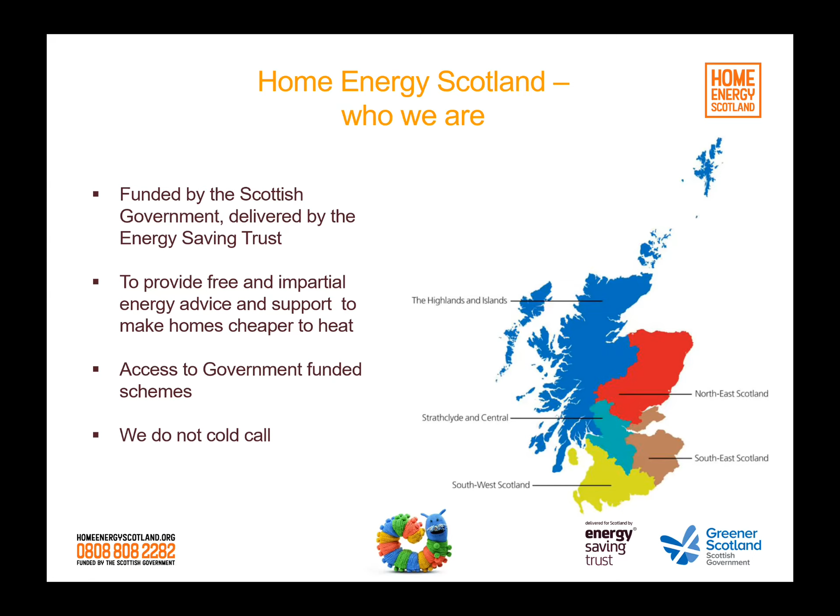In terms of the presentation today, we'll start off with some of the basics - this isn't to patronize, it's just to get some context as to exactly what we're talking about here.

The primary interest in terms of electricity and heating is going to be heat demand - how much do I actually need in my property to keep warm and be comfortable? There are umpteen variables on that.

Part of my job is surveying properties, so I've been in thousands of houses across the whole area. I know the particular challenges we face in remote rural locations, and more particularly the fact that off the gas network, a lot of our heating is electric. That does pose certain specific questions.

In relation to heat demand in buildings, there's a number of variables: the size and age of the building, the exposure of the property, who's actually in the property, number of individuals, whether they have underlying health conditions, whether there are kids, whether people work from home, is the property empty during the day, do people work shifts, etc.

The most important factor is the kilowatt hour demand - this is fundamental to the conversation today. It's about thinking in kilowatt hours, which translates to how much energy our utility suppliers demand from the property, and that translates to both carbon and expense. Kilowatt hours is the absolute key here - it's the cost for each unit of heat.

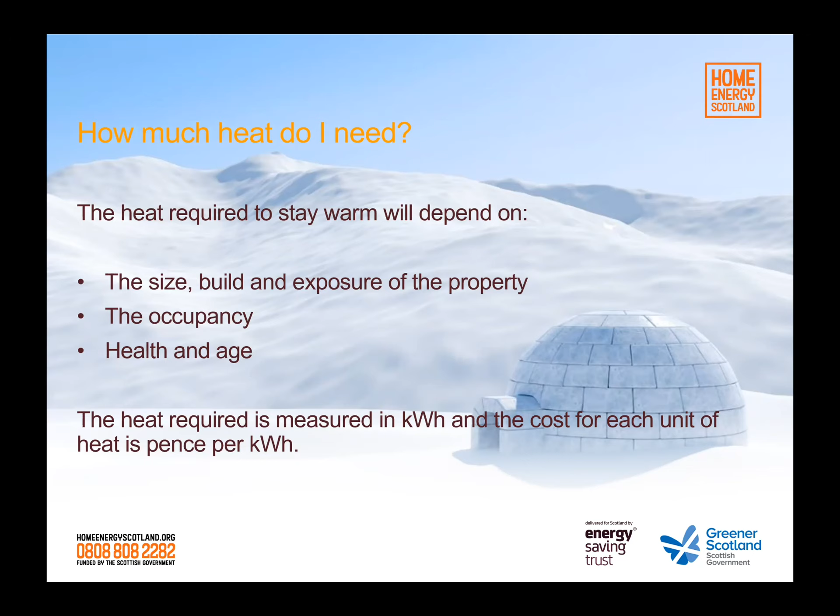That might not sound particularly interesting, but looking at unit costs of heat in kilowatt hours is very telling - prices do fluctuate widely, but for those on the mains gas network it's 3 to 5 pence per kilowatt hour, and in fact you could probably get mains gas at about 2.8 pence per kilowatt hour at the moment.

Oil fluctuates very widely - at the height of the first lockdown, oil was down at the equivalent of 2.9 pence a kilowatt hour. Solid fuel and logs vary widely depending on the bulk and purchase. LPG is incrementally more expensive, cheaper if bought in bulk via big tanks, and more expensive in smaller bottles. Electricity has a huge range in price, from 9 to about 22 pence per kilowatt hour.

For our discussion today, I'm sure many of us are fairly sick and tired of hearing about average costs to heat a home, because it's always using mains gas prices, and it doesn't illustrate the fundamental difficulties and challenges we have in our part of the world.

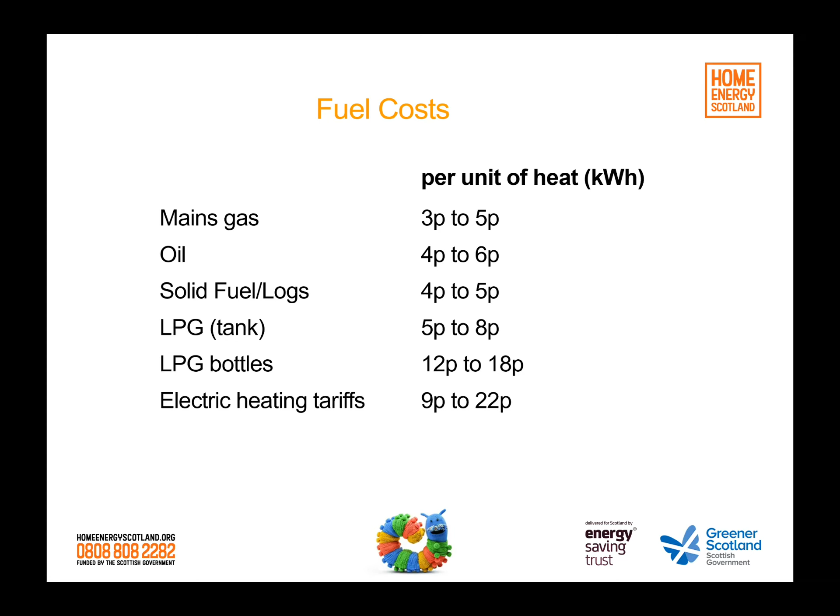Looking at those figures, it's very telling, the challenge that we have. If you look at the unit cost of electricity, it's potentially up at 20 plus pence per kilowatt hour in comparison to mains gas prices. It's a huge difference, and that does have fundamental implications on a whole host of issues.

So if we move on to types of electric heating - at any point please feel free to stop me here - I've just tabulated some electric heating types. Again, this is not to patronize individuals in any way, shape or form.

It's just a framing, a discussion point here. I've deliberately kept renewable heat separate, and that'll be on my next slides. So if we concentrate firstly on electric dry heat and some of the misconceptions.

If we look at electric, we have panel heaters, plug-in heaters, high heat retention storage heaters, that type of thing. The misconception with storage heaters in particular is that they're inefficient. They're not. They're 100% efficient. They convert all their input to heat.

Every electrical unit that goes into a storage heater is converted to heat, so it is efficient. The difficulty is there's a complete lack of control, so it's not effective. Effectiveness and efficiency don't mean the same thing. Lack of control means it's not effective, and not effective means it's uncomfortable and expensive. Using those simple terms highlights some of the issues.

Because the biggest issue that I come across in our part of the world is underheating. So comparable running costs can be tricky, because if you underheat, you're not actually representing what the heat demand for your property is. And often what you find is when people switch to another technology, the complaint is 'I didn't save as much as I anticipated,' but you do find the individuals are actually far more comfortable. So they're heating their homes effectively, but the cost is more representative of what it should be - many people just underheat because they can't afford to heat in the first place. So that's a quick summary of storage heaters, but it just shows you where advances are being made.

What I would say is be very, very careful about some of the claims on electric heating. Some very fancy electric heaters are marketed very heavily, and they are not what they claim to be - they are not storage heaters. A storage heater operates on an off-peak tariff and holds charge, several kilowatts of charge - anything up to 22 kilowatts, it will hold. Many electric heaters look fancy, they're marketed as storage heaters, often it says German technology, but they're not storage heaters. It's high heat retention storage heaters that you're looking for. I'm not saying there's anything wrong with the other types of heaters, but effectively they are just room heaters with controls.

So just be careful of knowing exactly what it is that you're looking at in terms of heating. And again, this illustrates the difficulty of heating with electricity, because there are so many options. Mains gas, you get a boiler, that's it - fire it through radiators. Oil's exactly the same, so fossil fuel delivery is much more straightforward in terms of the technology. There are a number of electric boilers across the Highlands, and they are hideously expensive to run. Effectively, you've got a big kettle that you're boiling up and heating your home. I find on my visits that the most expensive heating option is an electric boiler.

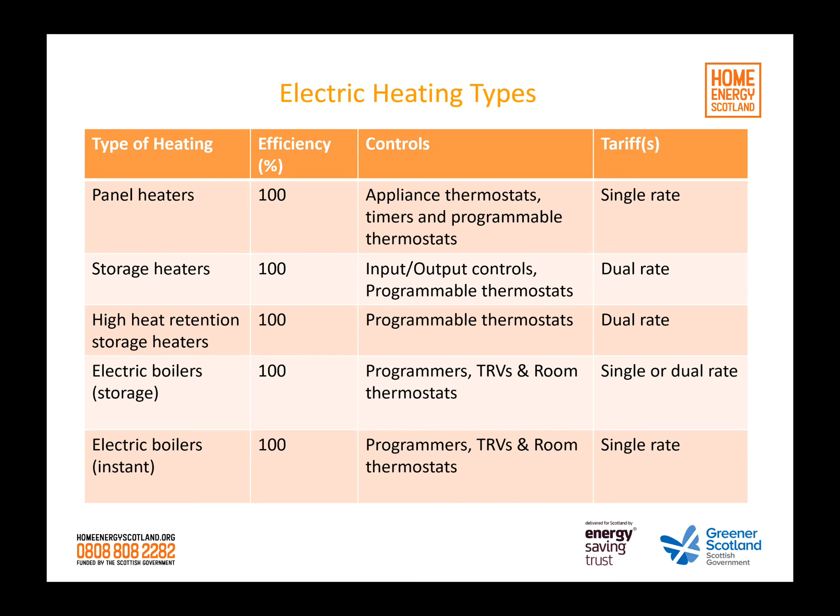One that I wanted to focus on, because this is becoming much more prevalent and widely available, is the air source heat pump. Now, I could spend a whole hour talking about how air source heat pumps operate and all the rest of it, but that's another topic area. Essentially, a heat pump is electric heating, it just delivers it through a different mechanism. But to all intents and purposes, you have a full wet central heating system, i.e. radiators, pipework, and a hot water tank.

Broadly speaking, if you have one unit of electricity, you will probably convert it to about 3.23 units of heat. So think roughly about 300% efficiency - for every unit of electricity, you're producing about 3 units of heat, and that's a yearly figure.

What you'll find with heat pumps is that manufacturers will claim a particular efficiency, and there's nothing wrong with that because broadly speaking it's right, but that's in a sort of manufactured environment. What we're interested in is what that heat pump does over the course of a year in terms of efficiencies.

In a factory, probably, well, it's over 400% efficient. So you'll get 1 unit of electric to over 4 of heat on many, many days of the year. But if we go back to February, where it's particularly cold, the efficiency will drop slightly. So what you want to know with heat pump technology is what it's going to deliver over that year, rather than just a very narrow ideal window where it's relatively mild.

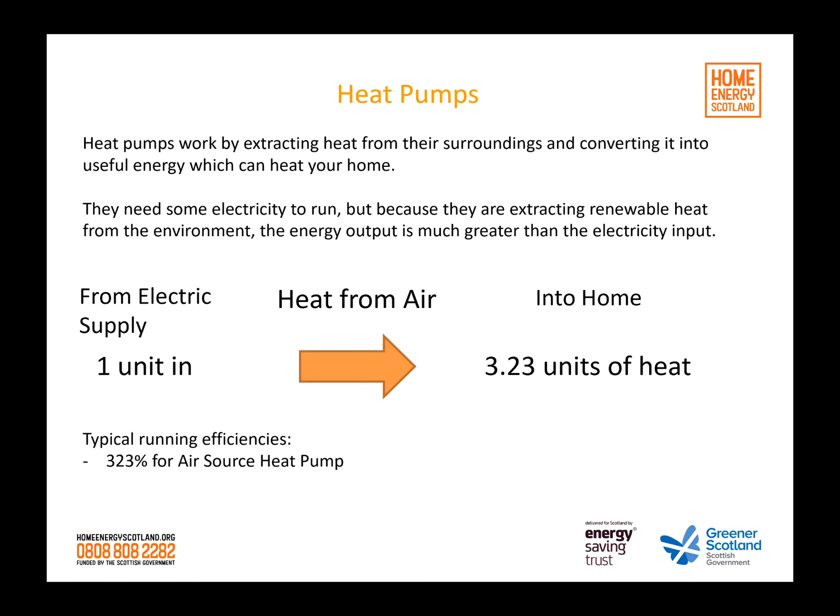But the one fundamental that we really do need to discuss is what considerations do you have for your heating systems, and what are the implications by going down that route? So if we think about our electric heating options, the electric direct is relatively straightforward. The units themselves accommodate in quite small areas, they're quite flexible, and there's very little disruption because it's a straight wiring job from a sparky, and it's quite easy to undertake as work.

So in terms of the actual setup in a property, electric direct, storage heaters and panel heaters are quite straightforward. If we look at other delivery mechanisms such as radiators and pipework, then you need to start thinking about the space to accommodate the equipment - radiators, pipes, big water tanks, the heat pump unit itself. And also, really, really important is the suitability of the property to the technology. This is absolutely critical, and more particularly with heat pump technology.

So we know whilst storage heating and direct acting electric heaters are expensive, they can still deliver heat to our properties in our part of the world. And our property type is mixed - we've got a lot of traditional buildings, many with extensions, multiple ages, multiple fabrics, and quite complex buildings. And therefore, they might not necessarily suit some of the modern technologies in their current state. This is really, really important when we talk about heating in general, and especially electric heating.

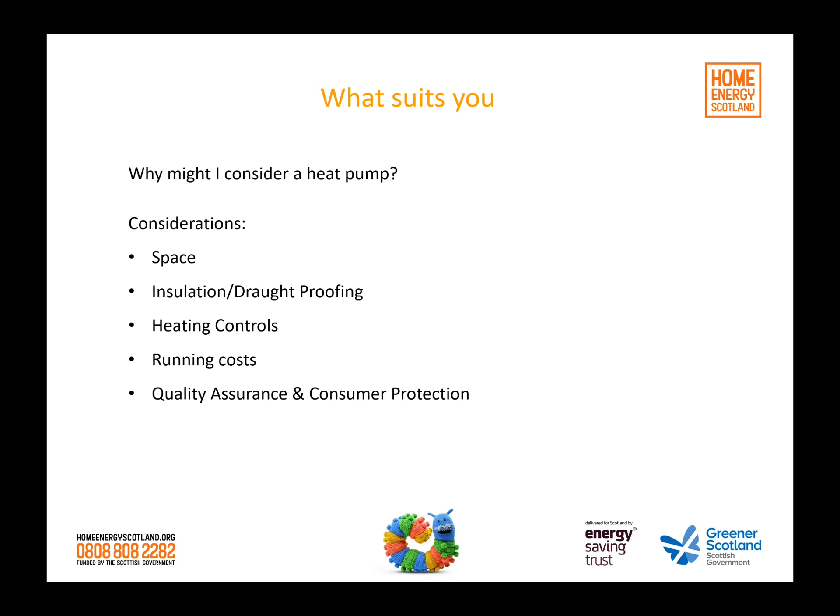The obvious areas are, well, let's just reduce the heat we need in the first place. That goes hand in hand with talking about electric heating, because we've got the highest unit costs. So if we can reduce the amount of heat input, we're going to reduce our bills proportionally more, since we've got such a big unit cost to start with. So we're always going to have the easy hits, if you like.

Loft insulation is fairly straightforward. If you've got an accessible flat part of your loft area, it's pretty easy to insulate, and it's a really good return—for relatively little investment and work, you get a good return. You still need to allow the building to breathe, so you've still got to have airflow above the insulation, but broadly speaking, very few issues with loft insulation, quite straightforward and very, very good returns.

Other areas that might sound really obvious but are often overlooked: think about the openings, doors, windows—really easy things that can be done, simple draft-proofing measures. Use curtains, blinds, shutters, anything you've got available as a quick hit. You wouldn't believe how cheap some draft proofing can be. Often people will just do some ad hoc things themselves, and it's very, very effective. I'm not saying it's a permanent or ideal solution, but it can work in the short and medium term just to cut down those drafts and heat losses.

So it's something that if you can invest in the time, disruption and cost, then we would recommend it where possible, but don't undertake the project lightly because it can be a challenge to do that work. What it does illustrate is that if you can retro-insulate as much as possible, you reduce that heat demand, and therefore your heating option becomes far more flexible and it reduces the cost.

The cavity wall insulation is an interesting one. Pre-filled cavities can cause issues - there's no question about this. Cavity walls, broadly speaking, should be filled to make them more energy efficient, with some significant caveats. There are issues when you've got wind-driven rain, high exposed locations. The cavity is there for a reason, and the reason why cavities have failed - and there have been a number of failures in Lochaber - is because the material used to fill the cavity has got wet.

It's blown fibre, and it's just not suited to high exposure properties. So sometimes it might be best to leave a gable wall or a high exposed wall, or if the cavity is particularly challenging - because quite often cavities get filled with rubble or have various other failures of the fabric, so you get all sorts of bridging issues. Cavity walls have huge heat losses, so if it's practical to insulate the cavity, it's an area where you can significantly reduce your heat losses.

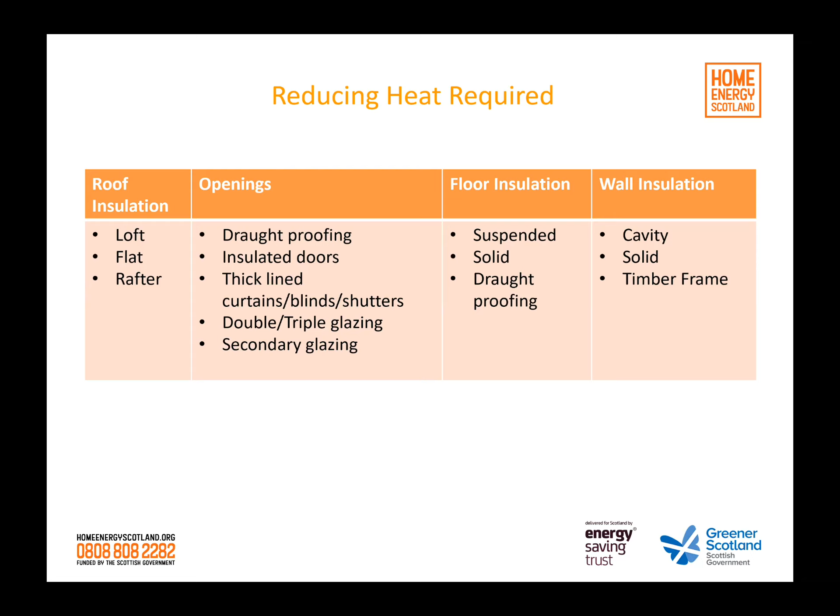We can talk about this more with questions afterwards if anyone's got specific questions. But I just want to highlight the importance of reducing that heat in the first place. Don't underestimate other areas, but heat is always going to be your biggest issue. When we talk about climate change and emissions targets, the biggest headache causing politicians and policymakers problems is domestic heat - that's a real issue in trying to achieve those targets.

That said, we can still help by reducing other areas of electrical usage. So don't dismiss other areas - whilst predominantly in an electrically heated home the bulk of your fuel bill will be on the heating, there are still other areas you can cut down on, like power hungry appliances.

Electric showers are huge consumers. We recommend, if you can get your showering down to 3 or 4 minutes with an electric shower, then fair enough. But if you've got a busy household with teenagers standing there for half an hour at a time, it can really start racking up the cost. You've got a 9 or 9.5 kilowatt draw, and that is a very expensive bit of kit to keep running, so your showers are a really big issue.

Tumble drying - this is quite contentious, this one, because of where we live. Tumble dryers are very heavy on the juice, it has to be said. But we've got to be practical here, because if you dry clothes in a house on a drying rack in a room, the amount of liquid going into that room - 2 to 3 litres of water - the amount of heat required to drive that liquid out is actually probably more inefficient than a tumble dryer in the first place. So you've just got to be realistic about certain things.

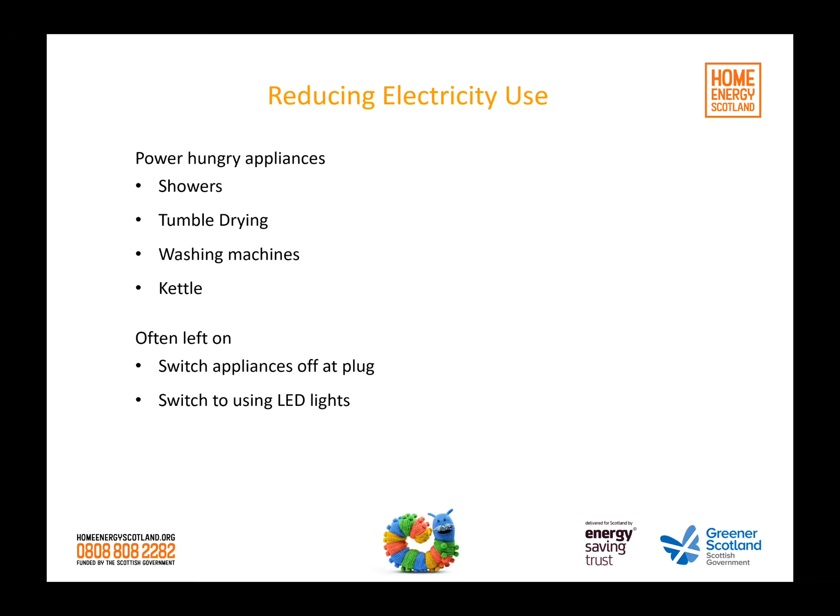I would say that switching to LED is certainly advisable. LED lighting is great - I'm not talking about CFLs, I'm talking about proper LED, instantaneous. It's bright, it works well, it's a low draw, and you can get different styles of lighting to suit your needs. I do a lot of reading and my eyesight's pretty poor, so a nice bright white light is effective for reading. You can have a yellower light for softer lighting, but it's very effective and very cheap to run. So switching over to LEDs is certainly something I would recommend.

Oops, I've gone back the way there. That's pretty silly, apologies for that.

Those individuals now don't have to shift coal. It's a huge improvement to their life, and they've actually changed their tariff to another deal on their electricity, which has saved an additional amount. I do accept that's a good example - the whole point here is I want to provide a good example. Not everyone can do that, but it is achievable.

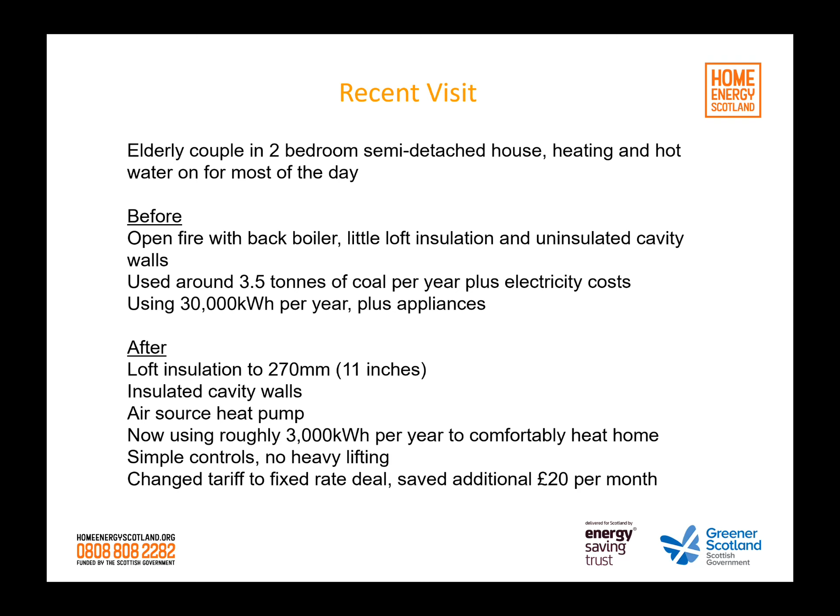In terms of Home Energy Scotland, we've got the free phone telephone number for people to call in, and we can talk about help and assistance for people to make change, receiving that impartial advice. We work very closely with community groups, local authorities, and organisations just wanting to help people on an independent basis to make and facilitate change there.

So I'll stop sharing my screen, because you're probably bug-eyed looking at it.